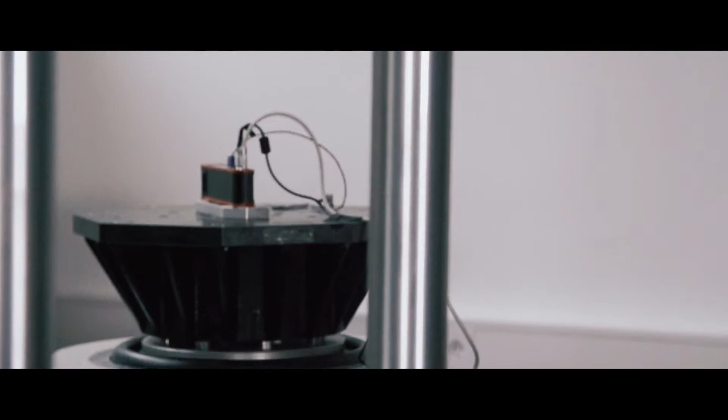The in-house electronics development team designs analog amplifiers, instruments, and accessories together with a mechanical chassis team. We have in-house labs for electrostatic discharge, electromagnetic compatibility testing, power supply burst, power supply surge, temperatures from -40 to hundreds of degrees Celsius, shock up to 1000 G, and vibration up to 100 G testing to make sure our instruments meet the highest standards.

Okay, when I look at production, we have more individual, handmade manufacturing than mass production. Isn't that very expensive? Well, we are going more and more into mass production. Some years ago, we started with single projects and produced them in Rolls-Royce style. Now the quantities are bigger, and we need to grow with that.

We developed a strong ERP system with perfect traceability. We design everything without cable connection style. We still design instruments in cooperation with customers, but on production we need to be faster. We need to deliver in a short time. Time is money for us, and also for the customers.

Yes, it is. Jure, I think you did a great job when you started to rebuild the complete marketing strategy. I remember after 13 years of building up the brand Dewesoft, you just changed logo and outfit. Later, we changed from a technical datasheet-based style to real attractive marketing.

We always created instruments with passion. I got the question years ago, why do we take so much care about the outside of the instrument? Why is it not just a plain sheet of metal? I answered, because we can, and because we also want the instruments to look just perfect.

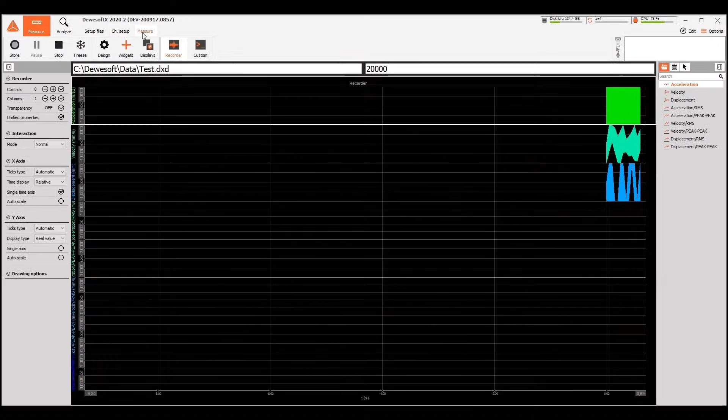On the client side, we enable the OPC UA Client plugin and enter the IP addresses of the servers. We can then browse the server's information model to select channels or methods that the client should use. When selected, they appear in the Channels tab and can be used as regular Dewesoft channels.

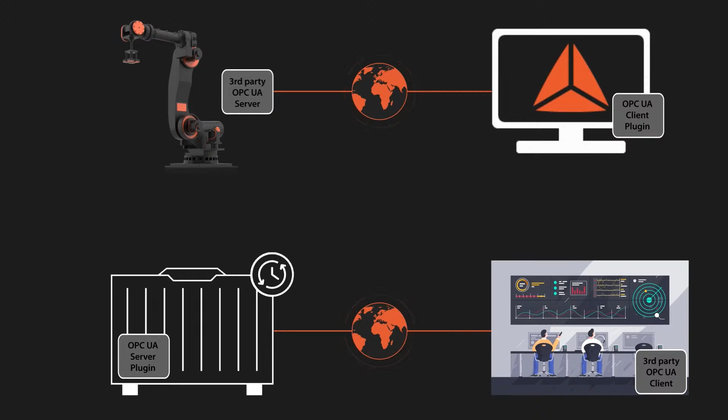Of course, both plugins can connect to third-party systems running OPC UA, making Dewesoft Industry 4.0 ready. The only limitation is that when either a server or a client is not Dewesoft X, the data rate is limited to about 1 kilosample per second.

That is because there is only one data sample in each data packet, and clients will typically send packets at 1 kHz at most. When both client and server are Dewesoft X, the number of samples in one packet is dynamically adjusted, which massively increases the bandwidth utilization. Data rates over 1 gigabit per second can be reached. That is what we call the DAC profile for OPC UA.

In addition, Dewesoft's DAC profile makes use of retransmit functionality. If there is a connection drop between server and client, the data is stored locally and retransmitted when connection is re-established.

To me, OPC UA communication seems to have very similar functionalities to the established Dewesoft NET. Is there a difference? Yeah, the result is similar, but while NET is a proprietary protocol that is purpose-built for Dewesoft DAC systems, OPC UA is industry standard and enables our systems to be integrated into a wider network. Dewesoft NET will still be used in large tests because it can configure measurement units. However, OPC UA is the right choice for long-term monitoring applications where the configuration remains static.

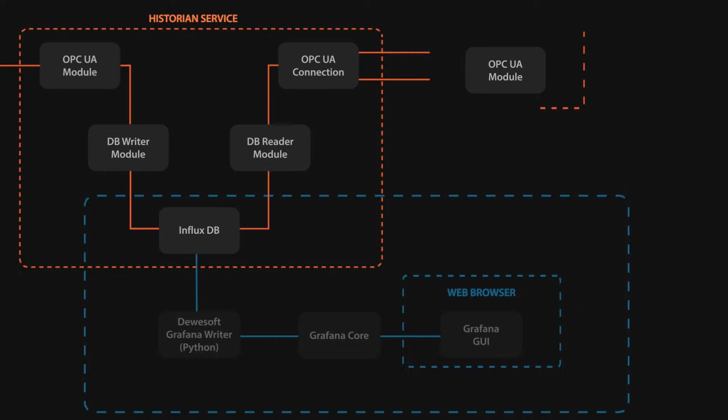On the user side, there are two types of clients. A web client is based on another open source product called Grafana. It provides visualization of long-term data and is accessible on any platform, including mobile devices. In parallel, the database can be accessed by an instance of Dewesoft X3. Using the Historian Importer plugin in analysis mode, the data from a chosen timeframe is loaded into a Dewesoft data file.

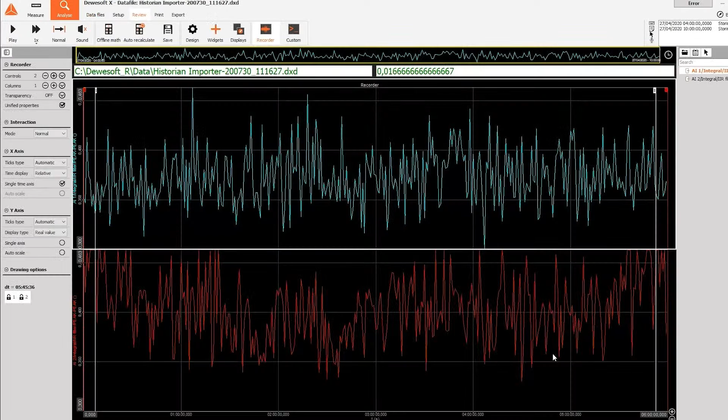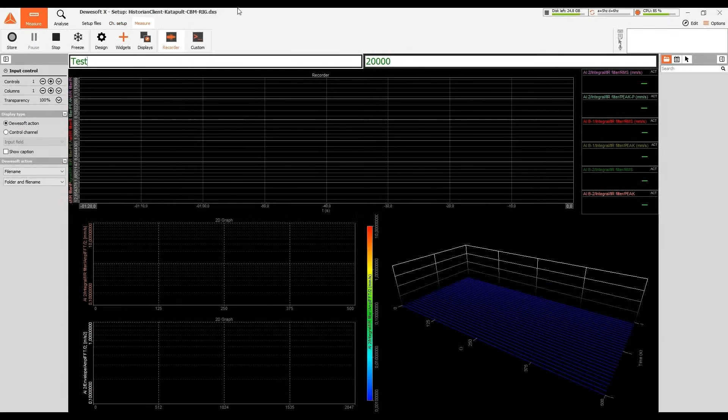Alternatively, the data can also be streamed directly from the measurement units to the client, providing a detailed live view. Keep in mind that Dewesoft's retransmit functionality ensures that the data is safely written to the database even in case of network issues. During a disconnect, the data is written to a local buffer on the measurement unit and then transferred to the database when the connection is re-established.

Utilizing our experience in measurement technology, we have developed several enhancements for the Grafana web client. Using Grafana within the Dewesoft Historian environment, the loading of year-long data will be almost as fast as loading only a day of data. A special plugin was developed to enable 2D graphs in Grafana for the display of FFTs and waveform scope shots. Dewesoft Historian is a core component of monitoring applications like structural health monitoring and machine condition monitoring, where long-term data analysis is a key requirement.

Since the architecture is completely distributed, it enables access between components no matter the location, as long as internet access is available. The Historian was even used to transfer data over a 4G network from an airplane to provide a live telemetry view to several base stations.

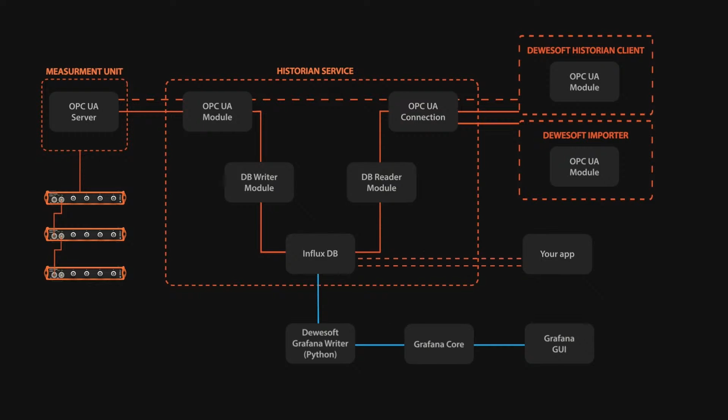It can also help you organize data from long-term tests. Instead of searching through old data files, a central database can be used to store the data in the same format for years. And guess what? Since we are using a well-documented open-source database, you can communicate with it using your own applications to build even more complex monitoring systems.

The same is true for the OPC UA interface, which can be accessed by third-party OPC UA clients. Dewesoft Historian brings the data from the most capable data acquisition hardware and software on the market into the cloud for historical and worldwide access, keeping core Dewesoft features intact: reliability, usability, and expandability.

Congratulations to the development team that put all this together. It sounds amazing, but it seems complicated to set up.

That's why Dewesoft has established a monitoring application group that takes care of system installation support. First, there is a detailed manual available, and customers with some IT knowledge can set the Historian up themselves. Second, we can set up the system on the customer's servers.

How does that affect the price for the customers? Yeah, good question. We have several models. The most basic model is a one-time buy license. The customer buys the license and is responsible for setting it up himself, maintaining the database and working with the system. I can imagine this will mostly be used by system integrators as part of a wider solution for their customers.

What about end users? How can we support them? There is a model that includes our installation support. The price then scales with the number of channels in the database and with the number of clients.

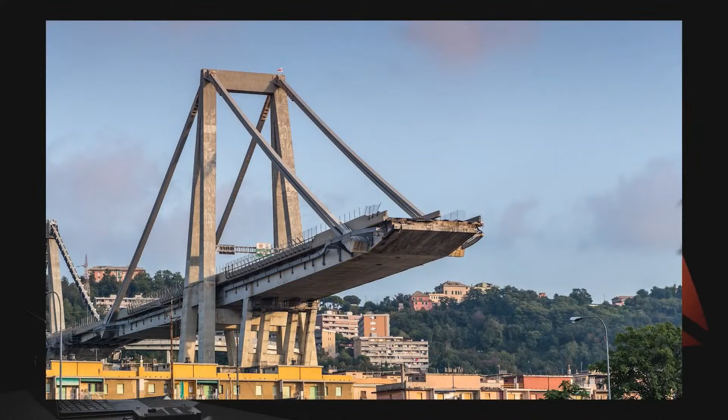Did you know that the majority of bridges were built soon after the Second World War? This means they're fairly old. In fact, there are thousands of structurally deficient bridges in Europe alone. Governments don't have the capacity to repair them all at the same time. They need to decide which ones are the most critical. The only way to make a qualified decision is to continuously monitor them.

The monitoring campaign needs to be done on a large scale. For that to be possible, the technical solution needs to be reliable, simple to deploy, and cost-efficient.

Acceleration sensors are the simplest to mount on an already built structure. They allow us to perform vibration analysis as well as to measure long-term angular deflection.

High-resolution accelerometers used to be too expensive for mass deployment, but recent advances in MEMS technology allowed us to introduce a fully distributed vibration monitoring solution, IOLITE-D 3x MEMS ACC. But the sensor is only a starting point.

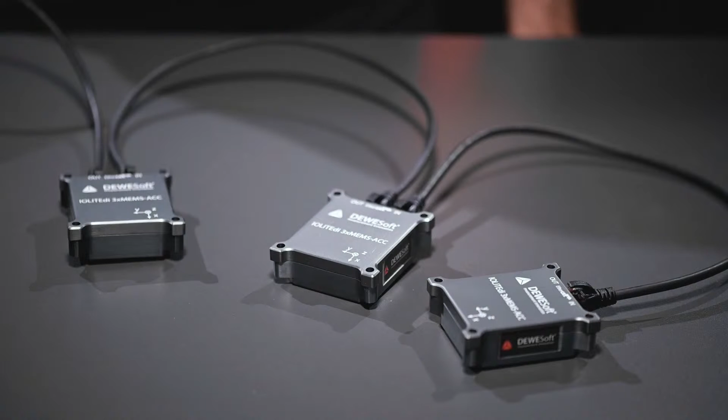Devices are daisy-chained by a single cable for data, power, and synchronization. There can be up to 100 meters between devices, which can be further extended by repeaters or optics. EtherCAT protocol ensures synchronization down to 1 microsecond, independent of cable length.

Network cables with RJ45 connectors are there for fast on-site crimping. The 3x MEMS ACC is also available in a waterproof enclosure for direct outside mounting on the structure.

Data from the measurement chain is collected by a powerful Dewesoft X3 software that offers modular mathematical functions from filtering and integration to frequency detection and modal analysis. Several visualization tools like 3D graphs and XY plots are available for a quick creation of customized user interfaces.

Calculated data can be uploaded to a database for historical data overview and trend analysis. Dewesoft Historian enables a large measurement system with many measurement units across the bridge, or even combining data from several bridges on a central location. The data can be accessed from multiple clients from any location.

If additional sensors need to be used, Dewesoft has you covered with a whole product line of EtherCAT measurement devices that fit in the same chain with the 3x MEMS ACC. Anything from strain gauges to temperature or displacement sensors can be connected in the same system. In addition, the software allows simple integration of a video camera or a GPS synchronization source.

Even if our systems are easy to use, we know that you, our users, need to focus on data analysis. Dewesoft has a worldwide support network that will happily advise you on how to get the most out of our solutions. From the IOLITE-D 3x MEMS ACC distributed measurement device to powerful software, cloud storage, and worldwide support, Dewesoft structural monitoring solutions are capable of monitoring road and railway bridges on a large scale.

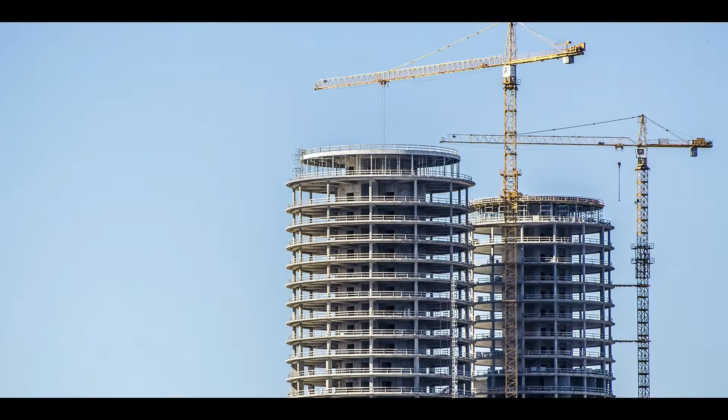A skyscraper construction is monitored using the Dewesoft solution. The measurement unit reads strain and temperature signals from static strain data loggers.

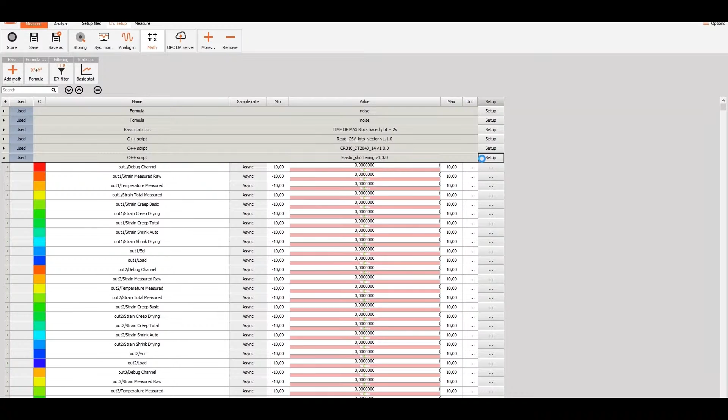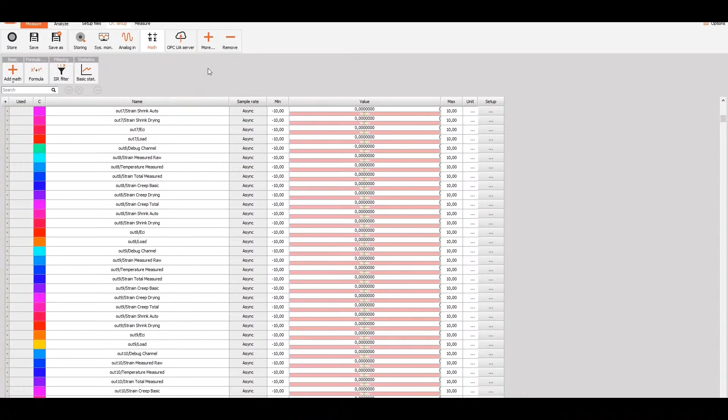A C++ script module runs calculations on raw data to output 10 parameters that determine the elastic shortening of concrete. There are 170 sensors installed, meaning 1,700 mathematical channels are stored to the database. An OPC UA server plugin uploads the data to the database, which runs on a cloud server.

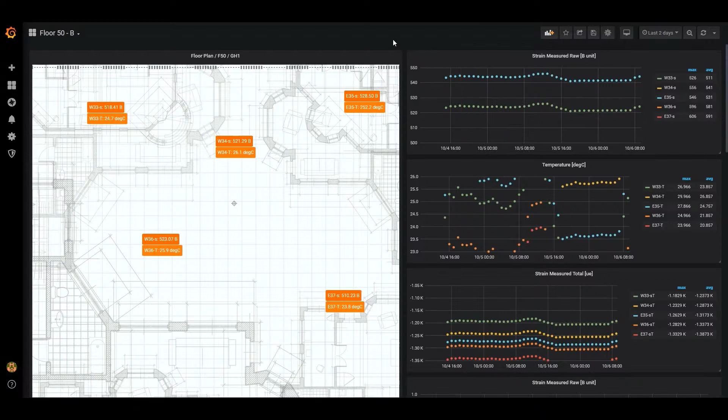A web browser user interface was configured for the live display of data in the customer's engineering office. Historical data from each segment of the building can be displayed in specified time intervals, and the displays can also be accessed on mobile devices.

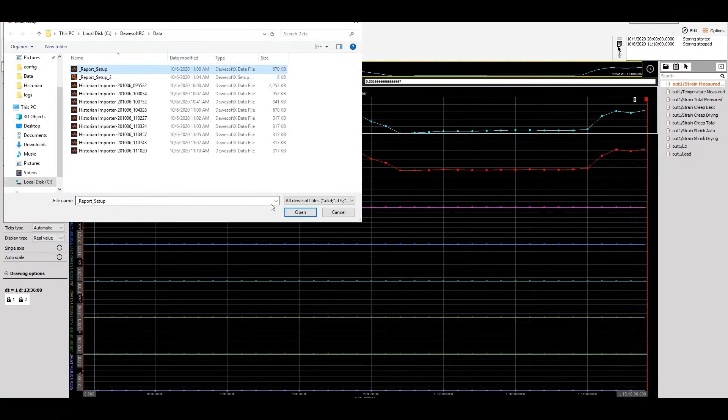Data can also be imported into Dewesoft using the Historian Importer plugin. It connects to the database and loads a specified time interval into a Dewesoft data file. A predefined setup can be loaded on top, which simplifies the generation of periodic reports that can be saved as PDF files.

What was the key value proposition for the customer in this project? Mainly the ability to bring the data into a user-friendly interface.

There are a lot of solutions for monitoring static strain on the market. Where customers struggle is at the point where data from a lot of inputs needs to be presented live and be available on demand for a specific time frame, especially if static and dynamic data is combined.

The flexibility of Dewesoft X allows us to integrate more or less any kind of hardware. Historian enables us to provide a central interface for the whole monitoring system.

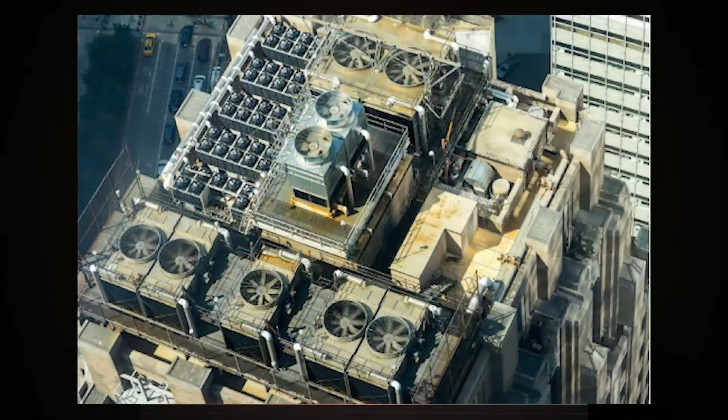Rotating machinery is used in various applications all over the world, providing convenience in our everyday life. However, improperly maintained machinery can suddenly break down, resulting in high maintenance and repair costs as well as lost revenue. In this short video, we will show you how the Dewesoft permanent machine condition monitoring solution can help you prevent sudden machine failures to improve your production availability and efficiency.

The Dewesoft machine condition monitoring solution is composed of sensors, data acquisition devices, and machine condition monitoring software. We offer a fleet of data acquisition devices able to read data from almost any kind of sensor used in machine condition monitoring applications, from single channel IP20 or IP67 devices connecting accelerometers and microphones, to multiple channel standalone or rack-based devices. The Dewesoft machine condition monitoring data acquisition product line is EtherCAT based, so combining different Dewesoft products in a single chain is straightforward.

Devices can be daisy-chained by a single cable for data, power and synchronization. There can be up to 100 meters between the devices. The EtherCAT protocol ensures perfect synchronization down to 1 microsecond, independent of cable length.

Data from the measurement chain is collected by a powerful machine condition monitoring software composed of PC client software and high-level web-based software. PC client software offers much more than just overall machine vibration levels. In-depth analysis features essential to detect failures and identify root causes are available, starting with acceleration, velocity and displacement channels, FFT, spectrum trends, envelope detection, machine elements identification, octave band analysis, torsional and vibrational analysis, and run-up close-down analysis.

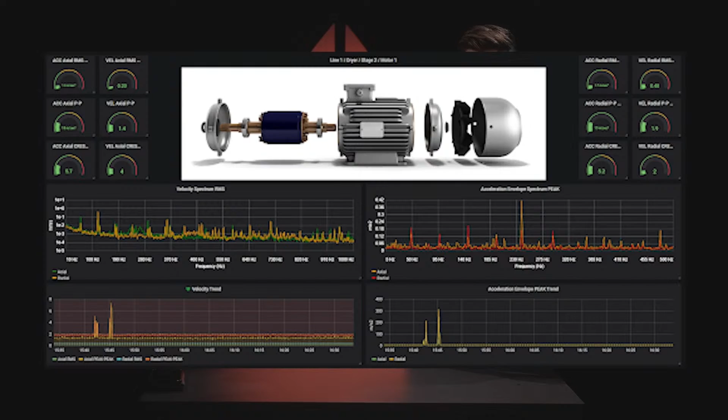High-level, web-based software offers an overview of the machinery state and trends over time relevant for decision makers. Setting of alarms, tied to email and SMS notifications is also available. Calculated data can be uploaded to a database for historical data overview and trend analysis, or sent over OPC UA to a third-party control system.

Dewesoft Historian enables large measurement systems with many measurement units across the production facility, or even collecting data from several locations, to be managed at a central location.

The data can be accessed from multiple clients from any location. Now let's see how the system works in reality.

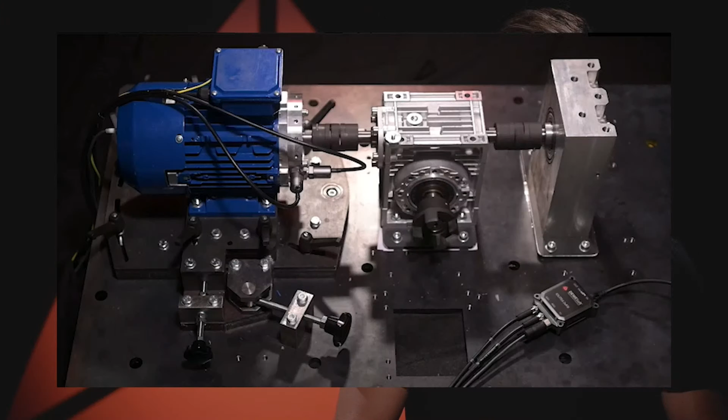We have built a demo composed of a small electric motor and a gearbox. By changing specific parameters, we will simulate a real-life situation and show you the simplicity of detecting some of the most common machine defects using the Dewesoft machine condition monitoring solution.

Let's run the demo. In order to move the motor, we need to first unscrew it from the base. As expected, the noise floor immediately increases.

We are moving the motor in the direction perpendicular to the shaft, creating a parallel misalignment between the motor and the gearbox. The position of the motor was horizontally changed by 3 mm, and the system immediately detected the misalignment. As you can see, the amplitude and the frequency of the motor rotational speed increased in the axial direction.

Because we have a small motor with a flexible coupling, there are also significant levels of the second harmonic in axial direction. To simulate the imbalance, we will add a mass of 5 grams on the outer side of the coupling.

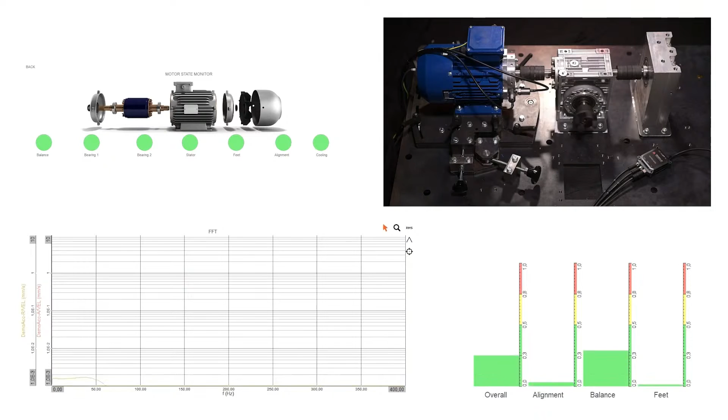We do this by changing the coupling screw with a longer and heavier one. This will move the center of mass away from the shaft center line and will cause higher vibration at the frequency of the motor rotational speed in radial direction. The Dewesoft system immediately recognizes the imbalance and the increase in the overall vibration levels.

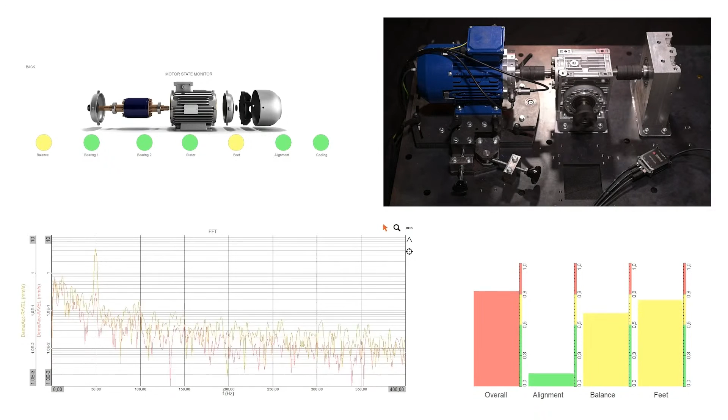We will now unscrew the motor from the ground at one of its feet. The advanced Dewesoft solution recognizes the increase in the noise floor of the frequency spectrum, which is caused by a loose foot. As you could see, the Dewesoft machine condition monitoring solution is a powerful tool for permanent monitoring of your critical machinery.

It enables production facility owners to reduce production downtime, lower maintenance and repair costs, and increase company profitability.

Just don't overlook the notifications!

Rok, what machine condition monitoring techniques does the Dewesoft solution support? We support almost any technique used in machine condition monitoring, starting with vibration monitoring using accelerometers or proximity sensors.

Temperature monitoring, tribology using dedicated sensors measuring oil conductivity, dielectric constant and oil temperature, performance monitoring using flow, pressure, current measurements, as well as thermography.

Bearing faults are one of the most common faults in rotating machinery. What kind of technology do you use to detect it? Bearing faults are definitely one of the most common faults in industries.

It is because the vibrations from all the machine parts are transmitted to the bearing, due to the fact that bearings hold the machine weight. For detecting bearing faults, we use the so-called envelope detection method.

What does envelope detection do, and how do you get the results? Let me explain by using an example. When a ball hits the crack in the race, the actual vibration that occurs due to the hit has a much higher frequency than the ball pass frequency.

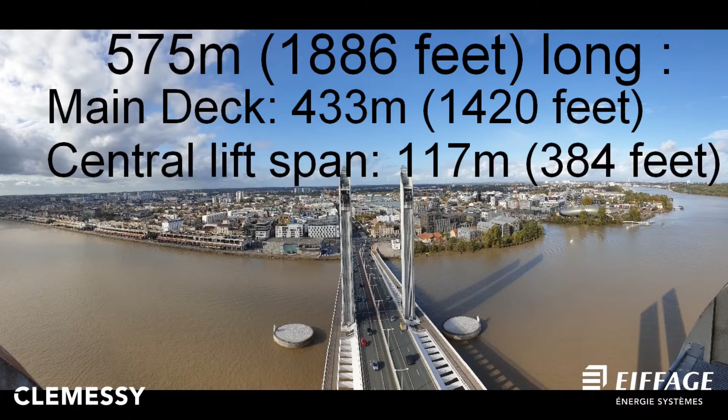The bridge is 575 meters long, 433 meters of which is the main deck, and 117 meters is the central lift span. The central section of the bridge remains in one piece but lifts vertically up to 58 meters to let tall ships pass underneath.

The weight of the lifted part of the bridge is around 2,600 tons. 40 ropes of 69 meters in length each connect to this center bridge segment via deflection pulleys at the top of 4 pylons using counterweights. The bridge is configured for up to 43,000 vehicles a day.

The bridge rises about 60 times a year. It takes just 11 minutes to fully lift or lower into place. Here, you can see the view from the top of one of the towers of the Chaban-Delmas Bridge.

Now let's talk about predictive maintenance and permanent monitoring. Operation and maintenance of the structure is the responsibility of the company Eiffage Énergie Systèmes (Clemessy), a branch of one of the top 5 biggest construction and concession companies in Europe. Eiffage Clemessy is specialized in the engineering and implementation of industrial technical installations.

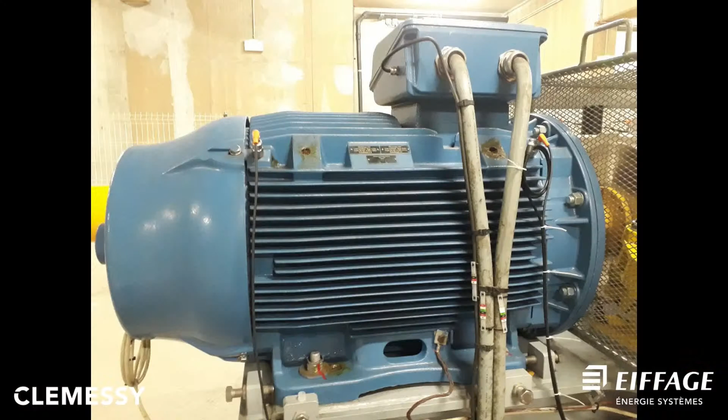The lifting mechanism works on the principle of a giant elevator and requires the participation of a team of 10 staff members. From a control tower, 2 operators manage the maneuver, while the rest of the team is spread over various strategic points in the foothills of the bridge. In addition to this, the team manages the maintenance of the vital machinery, motors, shafts, huge cables, and pulleys.

To increase the overall quality in predictive maintenance, we decided to install sound and vibration sensors to monitor the kinematic chain, the machinery, as well as the main pulleys on each side of the bridge. The bridge is mainly instrumented with IEPE sensors, accelerometers, and microphones, while current sensors and tachometers are only used in the machinery instrumentation. Now the interesting part begins: the measurement setup.

Things to look out for can be vibration and inexplicable noise, such as knocks, which are phenomena below 10 kHz bandwidth, so the maximum required sample rate was 20 kHz, which fitted perfectly with the maximum sample rate of Krypton, a rugged and distributed EtherCAT data acquisition system for field measurements in any environment.

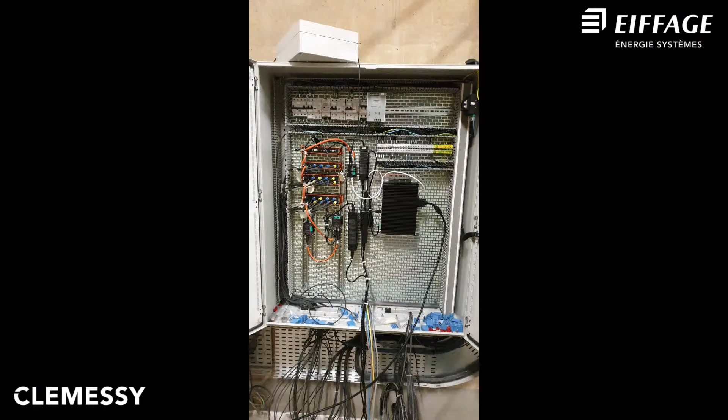Krypton DAQ systems have an IP67 degree of protection and can operate in the extreme temperature range from -40 to +85 degrees. The whole instrumentation is 82 analog input channels separated in 2 sides of the bridge, 41 channels for each side with 2 pulleys.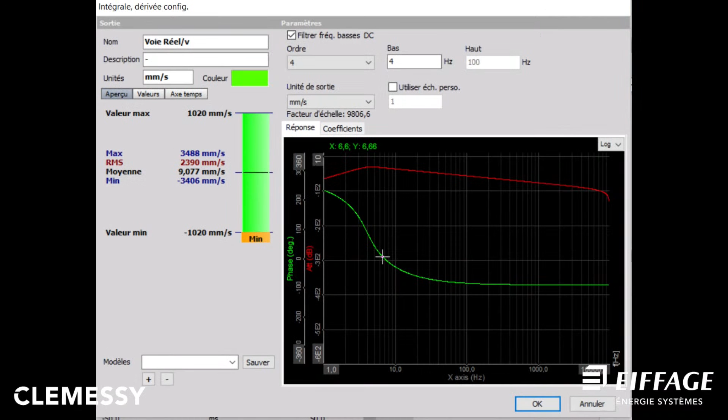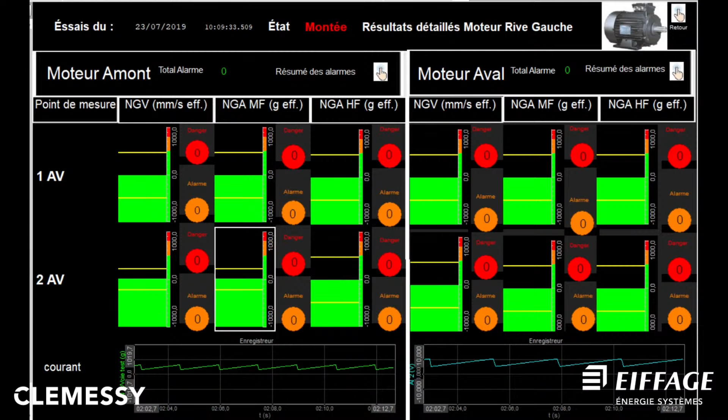This application required the math processing tools of Dewesoft X3 data acquisition software to calculate real-time statistical parameters on each vibration sensor. The point of interest for the investigation was not the time channels, but from each input sensor the customer required to calculate statistical indicators to compare with alarm levels.

An alarm counter written in C++ has also been implemented for this project. The challenge was to define the best DAQ architecture for this instrumentation, as some sensors are located on the top of pylons for the pulley monitoring.

Each side has 2 pylons, and these pylons are 77 meters high and no source of power is available on the top. Krypton modules based on EtherCAT protocol technology allow having a cable that can run up to 100 meters from module to module, connecting amplifiers together. A single cable is used to transmit data, power, and synchronization between DAQ modules.

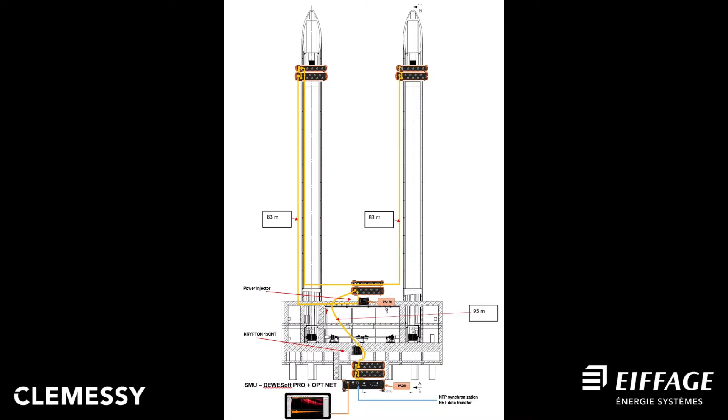Rugged DAQ module and EtherCAT were the 2 main reasons to select Krypton DAQ modules. These were the only solutions to place the data acquisition system on top of each pylon without big investment. Connect DAQ system with existing database over OPC UA.

We have seen how we go about obtaining the data necessary for predictive maintenance. But a problem persists: how to use this data? This is what I will explain to you in this second part.

Indeed, the other challenge, and not the least, was to interconnect the Dewesoft data acquisition solution to the database over OPC UA to exploit the data in an Internet of Things IoT solution. OPC Unified Architecture, OPC UA, is a machine-to-machine communication protocol for industrial automation developed by the OPC Foundation. This standard is frequently used in Industry 4.0 for communication and data sharing between different devices.

During bridge lifts, the condition-based maintenance team members are not situated in front of Dewesoft, but use a specific local web interface with only statistics and reports about the maneuver. The Clemessy database collects information from the Dewesoft OPC UA server, such as alarm levels, alarm numbers, shock counting, statistic level for accelerometers, microphones, and the DAQ status.

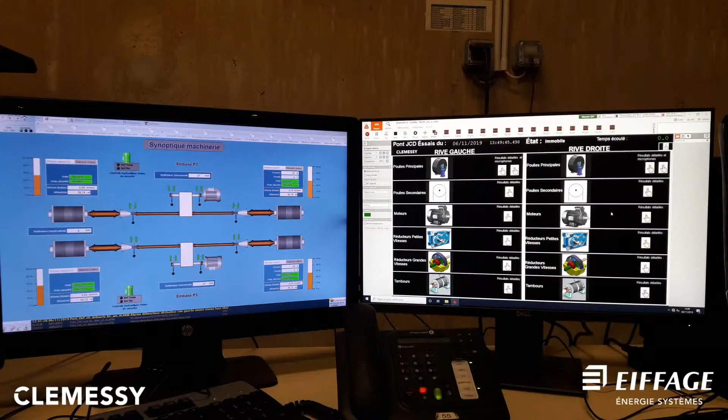Conclusion. Dewesoft and Clemessy were able to offer a complete hardware and software solution for the entire bridge data acquisition and monitoring instrumentation. The software is intuitive and very easy to use, and it includes 82 analog channels, 800 math calculations, 800 alarms, and a beautiful display.

The same system can acquire analog data, make the calculations, check the alarm level, and transmit the data using the latest communication OPC UA protocol to present data in a smart user interface.

The monitoring and maintenance of bridges have become real strategic issues for Clemessy. Unfortunately, we have many examples of bridge accidents due to lack of maintenance, such as the Genoa Bridge in Italy on August 14, 2018, which collapsed.

The realization of this project is a concrete showcase of the solution proposed by Dewesoft and Clemessy. I will conclude with a short time-lapse video of the final results.

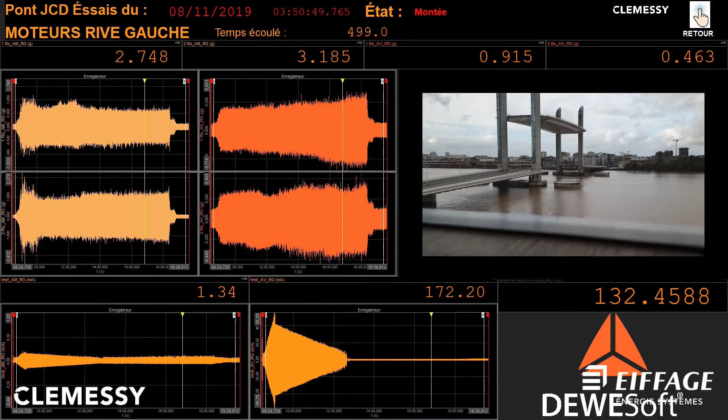The next story now we got from Italy. You know, Italy has many geothermal power plants. And to use geothermic energy is a very environment-friendly way for energy production. So it's more or less the future in energy production.

And the project we realized together with our partner there is spectacular in a way that we monitor the entire power plant. Hundreds of channels and even more mathematic channels, alarm monitoring, condition monitoring, all comes together. Over the period of 3 years, we developed this solution.

Now, let's talk to Matteo. How is the background? How did that develop over the past 3 years?

I am Matteo Galgani, I work at Enel Green Power. At the present moment, I'm here at Larderello plant, which can be considered the world capital of geothermal energy, where more than 100 years ago geothermal energy was used for the first time ever to produce electric energy. Smart Geo is for us a very important innovation project and technological advancement for our production plants.

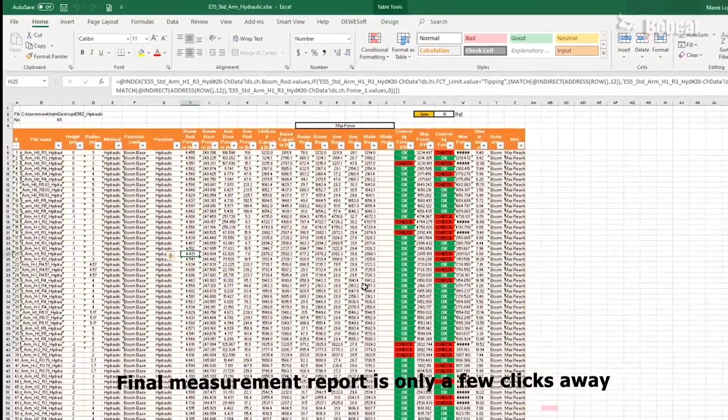How much effort was put into this project in terms of programming, setting up everything, and handling the robot who did the measurement automatically?

Thank you, Marketa. The majority of the time took programming the collaborative robot and creating a universal approach that can handle different machine shapes and sizes. Interfacing the collaborative robot with the Dewesoft SIRIUS amplifier was easy and straightforward.

The creation of the measurement setup in Dewesoft software, as well as adjustments of the plugin for the intensity probe, was quick. Many thanks to Dewesoft support for their quick response and hard work.

The last part of the project was how to export the data and create a repeatable report from the measurement. I used the Dewesoft Microsoft Excel template, which was very efficient. For example, I was able to create a 3D graph of the velocity field in a few clicks. This seamless synergy with Microsoft Excel allowed us to extend data post-processing capabilities even further.

And how much testing time can be saved now? It's hard to come up with a number of hours we saved, as we were unable to do this magnitude of measurement in the past. The main benefit of this solution is a massive improvement in measurement mesh resolution and improved repeatability.

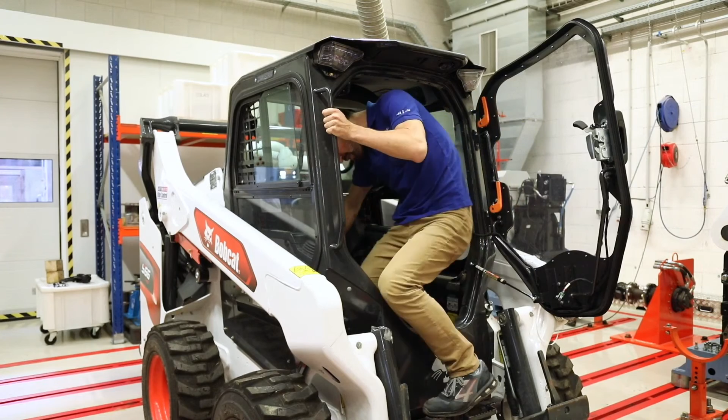The next application is as well spectacular. It arrives us from the US to monitor the biggest vehicle in the world, the NASA rocket space crawler, who transports the huge rockets from Cape Canaveral to the launch pad.

The difficult part in this project was to do the time correlation of all those signals using IRIG signal, and then correlate all the data and monitor it in real time and distribute it to many monitoring stations.

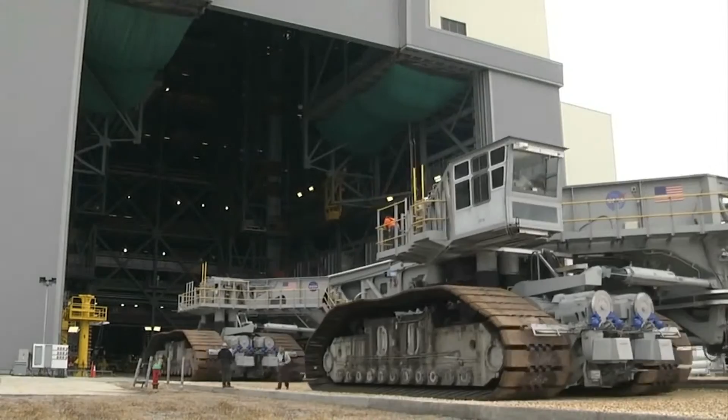Let's talk to Jake Rosendahl, who was project leader from Dewesoft site in Florida. Hello, Jake, this is a fantastic vehicle. What was the challenge in this project?

Hi, Herbert. Thanks for having me. Really excited to talk to everybody about what we're doing at Kennedy Space Center with NASA and Dewesoft. The crawler is an awesome vehicle, carrying around as much weight as it does.

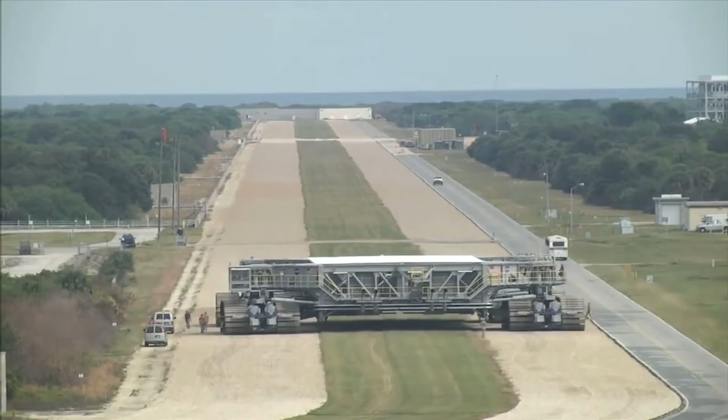What Dewesoft's been doing is we've gone in and replaced a very old data acquisition system that's measuring the hydraulic pressures across the system for being able to move and level 12 million pounds, and then also doing some low-level vibration measurements to be able to tell structural integrity and see what's going on to make sure nothing out of the ordinary happens.

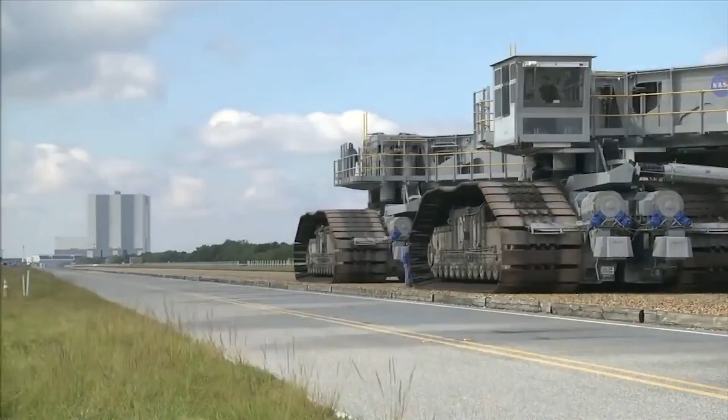So they are looking to keep everything within tolerable limits, because if anything alarms on these measurements, they need to stop and figure out exactly what's going on. When you're carrying 12 million pounds around, you don't want anything really going haywire. So it's an important task for Dewesoft equipment to ensure the safety of the rocket during transport.

Jake, does NASA also use other Dewesoft equipment in other applications? Yes, Herbert, there's actually a lot of fun things we're working on at Kennedy Space Center with. One unique thing - people think Kennedy just launches rockets, right?

No, they're actually tasked also with recovering the Orion capsule after it splashes down in the Pacific Ocean after everything's all said and done. Like everything with space travel, nothing can be easy, and it all has very unique challenges.

The Orion capsule is fragile. It's designed to fly through space and come back safely, but it's not designed to be lifted and moved around except by a rocket. So it wasn't designed to be lifted out of the water like the old Apollo, Gemini or Mercury capsules by a helicopter. Those were designed to have the structural integrity to be picked up by the top. The Orion capsule cannot - it's too big, it carries too many people.

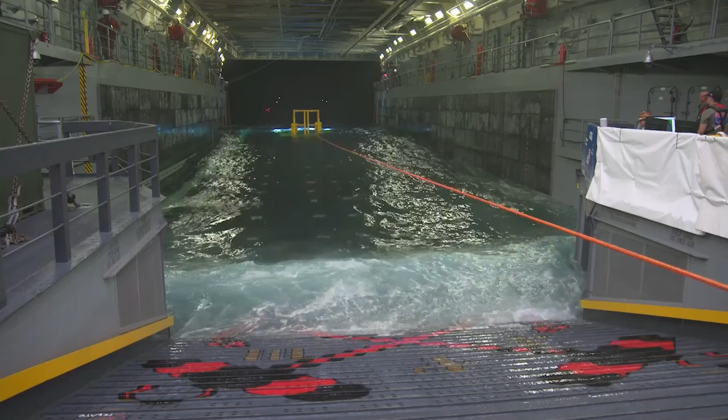So instead of trying to pick it up out of the water, they're going to let it float. There are these Navy ships that have a back end where hovercraft normally go in. They flood with water and put a cradle in there, and they simply float the capsule with ropes, pull it into the back of the ship, and set it down in this cradle, keeping everything nice and calm to preserve the capsule. With all these challenges, they're trying to figure out the best way to pull it in and secure it.

So what we're doing is we have instrumentation that they put inside the mock capsule - a Dewesoft system with an IMU, watching roll, pitch, and yaw and position of the capsule. We're also measuring load pins where the ropes are attached to the capsule to pull it into the ship, to make sure the loads being put on the capsule aren't going to damage it.

Simultaneously, while measuring on the capsule floating in the water, they're measuring on the winch pulley systems that NASA designed inside the ship, to see what kind of load they're exerting from the winch systems and what they're doing in movement. Using Wi-Fi, we get a total look with two Dewesoft systems - one on the ship measuring the loads of the winches, and then the actual impact of that in real time on the capsule as they bring it in and try to secure it.

As you can see in the videos, it is a very difficult challenge with different wave conditions, even when it looks like a calm ocean. Really cool, neat application that we get to play in as well.

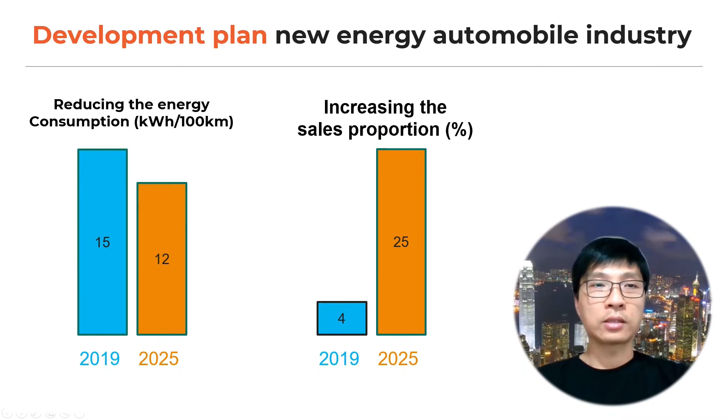Main goal is very simple: increasing the vehicle mileage. In other words, expanding the driving distance with a fully charged battery, while decreasing the needed energy per kilometer, which is more relevant as the number of vehicles in the market rises. To achieve this, the efficiency of the complete energy flow must be measured.

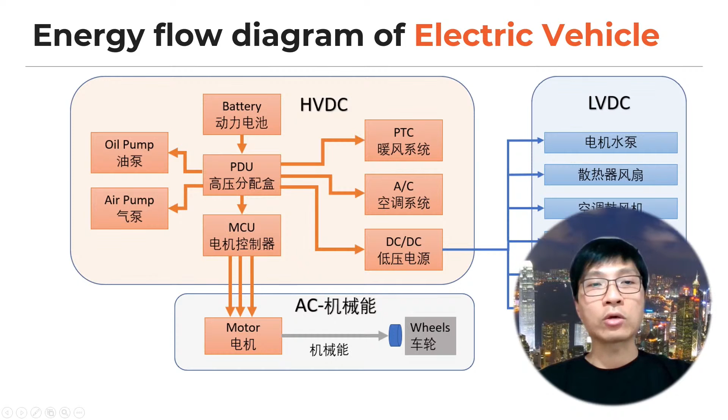Let's say, starting from the charging station to the battery, then followed by the power distribution unit to the main consumer, the motor control unit. Then also all the other consumers like air conditioners, heating, lighting are also very important. Finally, it is also the mechanical power of the motor which needs to be considered. With these measurements, you get a complete picture of the efficiency and you can optimize your vehicle.

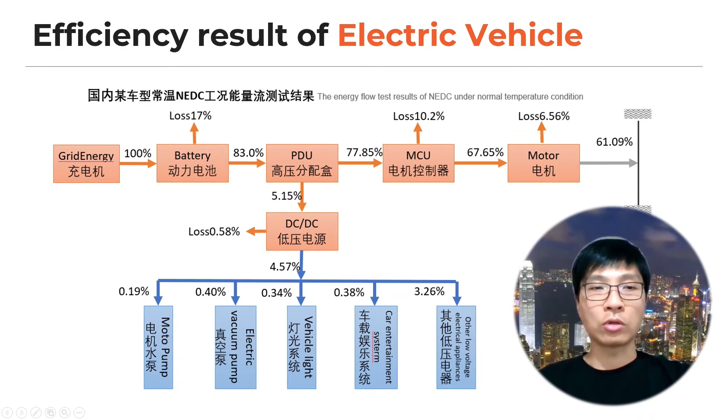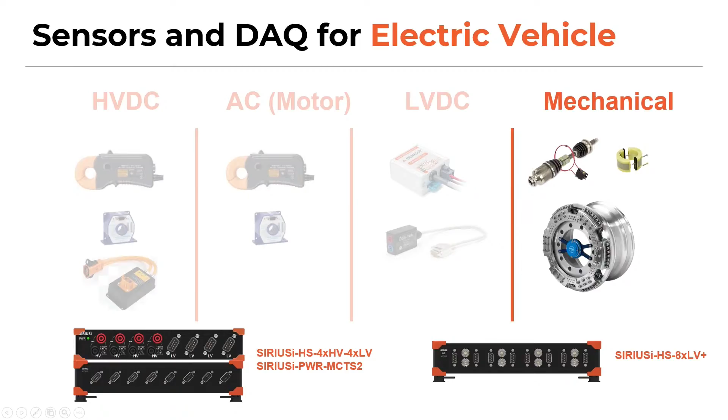For the whole application, Dewesoft provides the needed sensors as well as the data acquisition system. Starting from the high voltage DC path to the high frequency motor current, all other low power consumers can be analyzed with our devices. Jackie, where do you see the biggest advantage of our solutions?

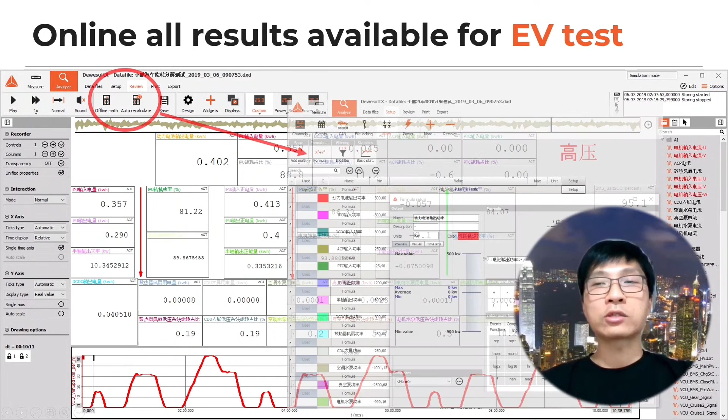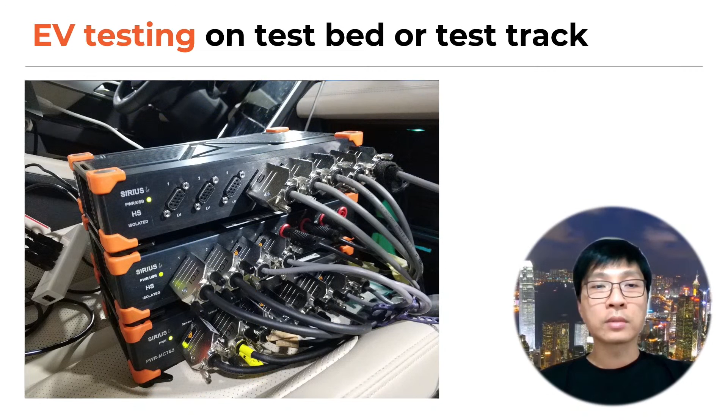I think many tests under various conditions must be performed, for example different temperature or different load conditions. Dewesoft calculates all results online, so there's no need for post-processing of data. These maneuvers are performed at the testbed, where Dewesoft provides many different interfaces to the testbed controller. The compact size of the Dewesoft power analyzers also allows usage in vehicles for public road testing.

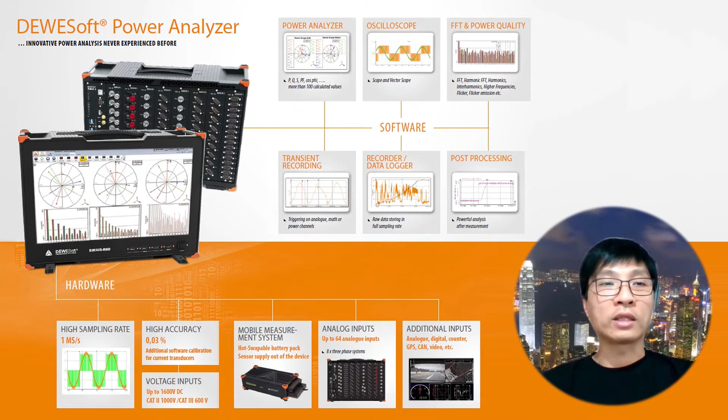Dewesoft SIRIUS provides more than just a power analyzer. You can measure any signals or ECU data to get the complete picture of your testing vehicle.

Jackie, we all know the actual batteries are the weakest point in any vehicle. How do you see the need for this energy measurement in the future? Actually, even if the classical lithium-ion battery is changed to a future fuel cell or hydrogen source with higher energy, such kind of efficiency measurements will stay important.

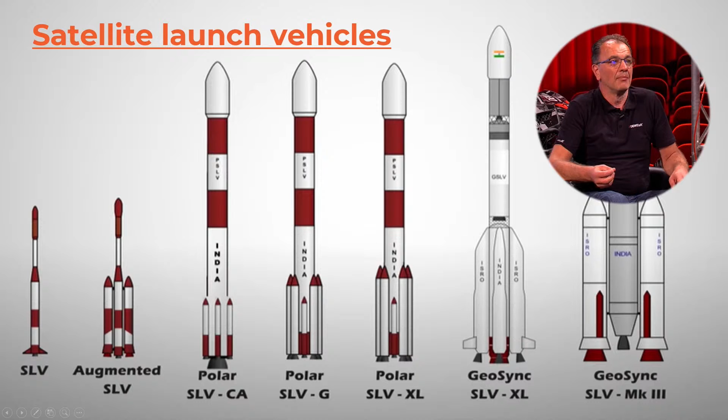I imagine at least some visitors might be surprised now. But India is much more than just the Taj Mahal, the crown of the palace. The 5,000 year old history of yoga in India shows their spiritual motivation starting already in childhood. It is also more than cricket, by far the famous sport there, almost a religion, played by more than 5 million people. India, with their 22 official registered languages, is the biggest democratic country with a higher population than Europe and US together. But this unity has also an exponentially growing economy.

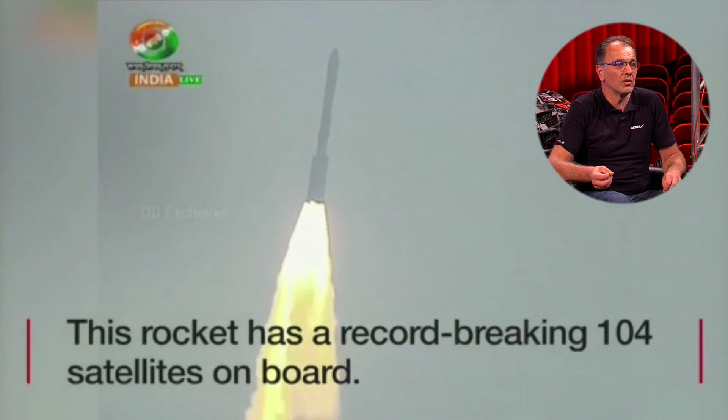Besides the known software industry, ISRO, the Indian Space Research Organization, is one of the industry segments. In 2017, ISRO created history by successfully launching 104 satellites on a single mission, overtaking the previous record of 37 satellites. All but 3 of these satellites are from foreign countries, most of them from the United States. This is a sign that India is emerging as a major player in this multi-billion-dollar market.

Now I want to welcome Mr. Dhiren Varghese, Managing Director of Dewesoft India, on stage. Dhiren, what is the role of Dewesoft at such launches?

Regards from Dewesoft India. You can imagine many tests are needed before a successful mission. One of the major tests is the structural dynamic test of launch vehicles. Data for more than 2000 channels has to be captured during the test run.

Dhiren, Dewesoft India was founded only 2 years back. How could you build up trust with the customer within this very short time? Dewesoft has been successfully represented in India with several partners for the past 10 years. One of our major partners is Innovative Solutions. Let's welcome Mr. Shaji Gopalakrishnan, Managing Director, Innovative Solutions.

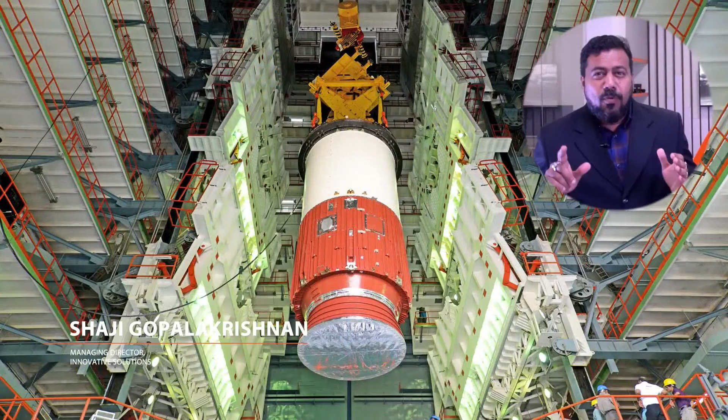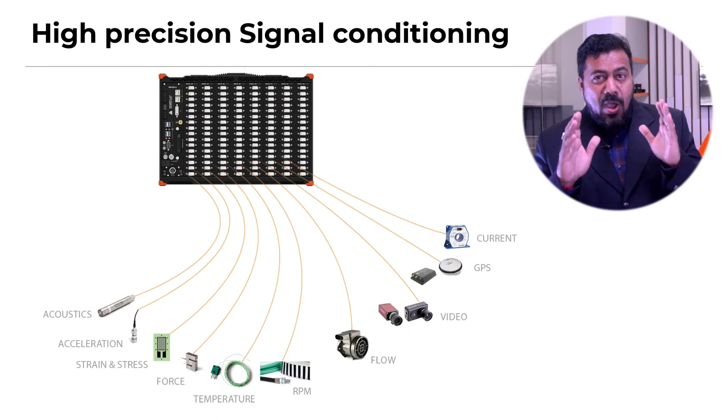Hi Shaji. Hi Dhiren. Please give more details about this project. The project is meant for qualification of Indian Space Research Organization satellite launch vehicle structure which carries the payload as satellite. The main motive of this project is to obtain data at the highest accuracy from sensors like strain gauges, pressure sensors, LVDTs, RVDTs through Dewesoft Precision Signal Conditioner.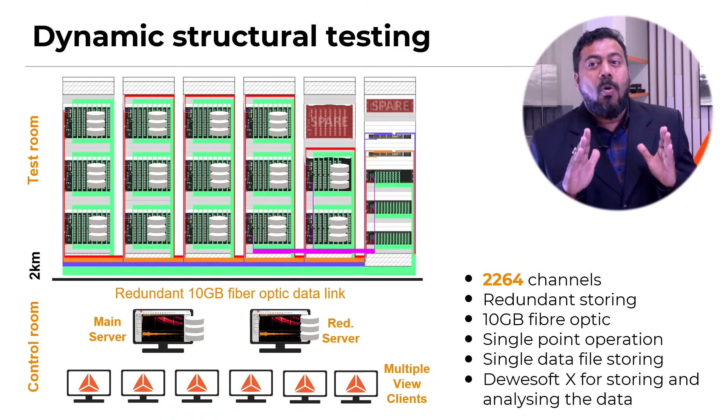In addition to the local acquisition and storage, the architecture for redundant data streaming is important to ensure data quality in critical test cases for ISRO. The entire data stream is then merged with the Dewesoft net functionality and transferred to the control room via fiber optic channels, allowing seamless data visualization of all data from a remotely located view client system.

Shaji, what do you see as the major advantage of the Dewesoft system for this application? Well, Mr. Dhiren, the major criteria for such a large system is the perfect synchronization of all the data. Apart from that, the accessibility of all data from a single point of view and retrieval of stored data for analysis using the Dewesoft X application makes the process much easier for the user.

The field-proven Dewesoft hardware and software offers best-in-class signal conditioning, topped off with the best isolation techniques. We also provide for each channel the real-time EtherCAT output for direct interfacing to any third-party EtherCAT master like PLCs, to avoid the hassle of wiring for 2000 plus analog outputs. We provide locally the complete system integration, including sensor wiring, local calibration, and service and maintenance of the entire project. This is the result of 8 years of hard work.